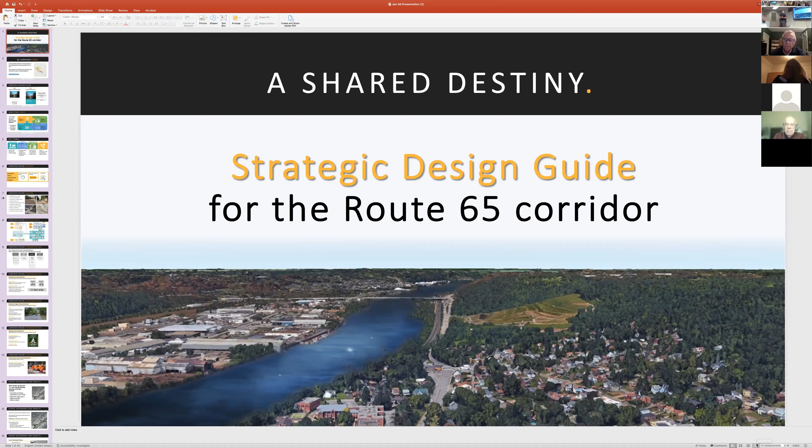With that being said, I want to introduce Kirsten from Michael Baker International Company, who is going to take over this presentation and introduce the concepts and findings.

Thank you all for being here today, and thank you for all coming out here on this icy night, and for those who are online. We wanted to talk through the results and present an overview of this report, the design guide for the Route 65 study. Tonight we're going to talk through the report, show you where to find it online, and we want to really hear from all of you what you think of some of these ideas, and have some discussion about how we can move these forward together.

I'm here with Michael Baker International, and we also have team members who have been working on this from the Remaking Cities Institute at CMU. And of course, Susan, who was working with the QV COG, as Patrick said — this was always spearheaded and led by the QV COG.

This whole process started before I even came on board, back when the QV COG identified the boulevard along Route 65 as this great connecting asset between all the municipalities. I know many of you have been involved in this process since the beginning, so this is not new to you — you know how important that is. You've been part of these conversations to figure out how to maximize that asset, maximize the economic and community impact value of working together along this corridor.

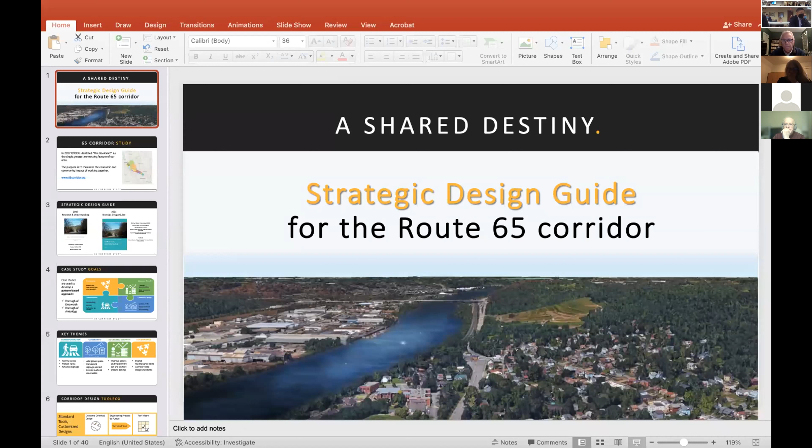We're not seeing the slides advance on the Zoom. Can't even see the mouse here. Hopefully for those who are on Zoom, they're able to use the chat or let us know, or just speak up and let us know if they're not hearing anything or anything needs to be repeated. Can you guys see the slides in Zoom? Yes. Do we get to see the slides? It's got to mirror the screens. It's gonna work out, yeah. Well, for everyone who's in the room, we'll try to get the slides back for you as well.

It's the mirror. I know we were going through just a little bit of the history — again, many of you are already familiar with this. There was a study done in 2019 that was led by CMU and the Remaking Cities Institute; they're going to talk a little bit about that tonight. That study, put out in 2019, was one of the first steps to really look at this whole corridor and define what is the vision for it, and what steps we need to take to start thinking of this as a boulevard. There was a research and understanding report that was put out, and I know that is available from CMU — it was available on the QV COG's website. That was the first phase.

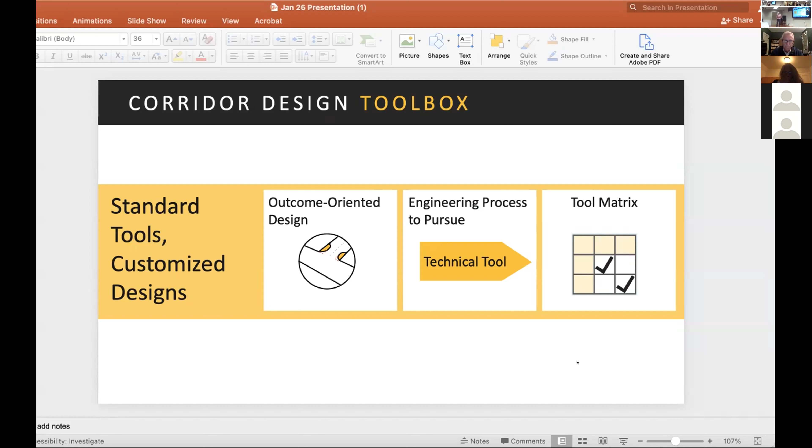So out of all of that, and out of all of the input we received from those who participated in the 2 workshops, we came up with a toolbox. We came up with a series of outcome-oriented designs paired with engineering processes to help municipalities understand how to go after achieving and implementing this process, and then a matrix to help them understand how these fit together, which ones can pair with what.

At a very quick glance, here are the 10 major toolkit items that came out of that. We're going to come back to these today because we're going to walk through them and we'd really like to hear from all of you. So our discussion will come back to all 10 of these, but we wanted to present, at a glance, what is in this report.

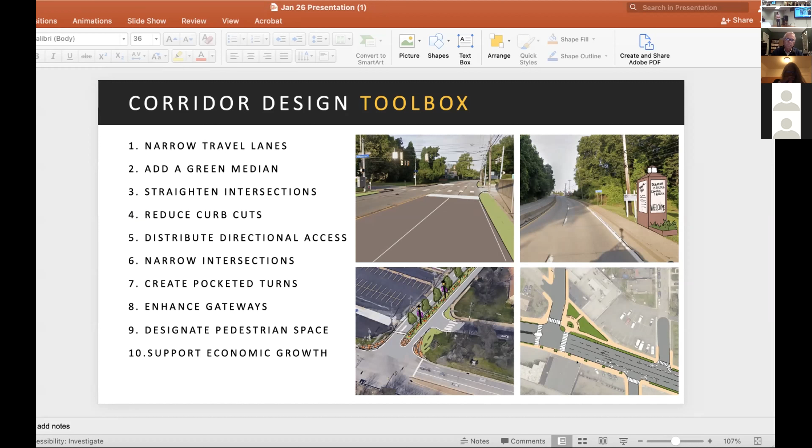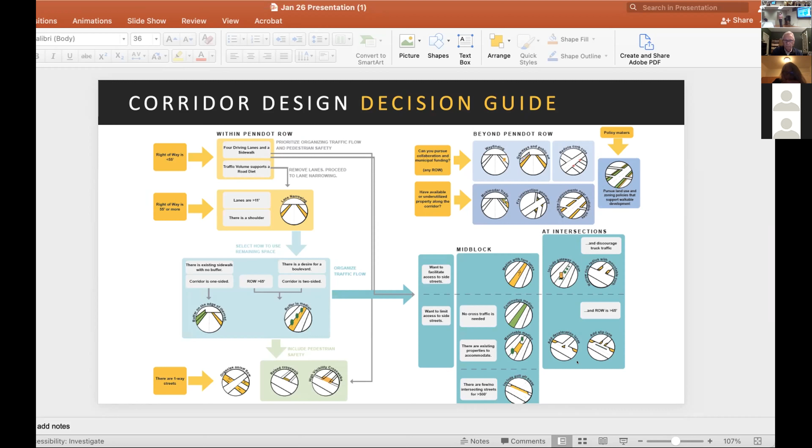With that, I'm going to pass it over to Steve to talk a little bit about the standardization. I know that's a lot of stuff in the toolbox, but again, we're going to come back to that. And I wanted to talk you through what are some of the other outcomes of this report.

Okay, thank you, Kirsten. Can everybody hear me okay? Yes.

The toolbox is great for giving you a whole range of design items to use for your particular municipality. We know that the corridor is not consistent along its whole way, and all of the 19 communities between Pittsburgh and Beaver along the Ohio River Boulevard, we know there's variations through that. And that's where the toolbox is very important for all of you.

We did find, though, that there were some items that needed to be standardized across the corridor so that one would know when driving on the corridor that it is the Ohio River Boulevard corridor. And we did that through 4 different items. One is the design of the roadway itself.

This is the paved part that you drive on. The second were the roadway edges—the sides and even a median in the middle—these are the locations outside of the travel lanes that you're on. Like, what's the edge of the road like? The third one is signage.

And we know that since there's 19 separate communities, each one of you wants to be identified in some manner, and we have a series of recommendations on consistency of signage. And the last item is construction zone.

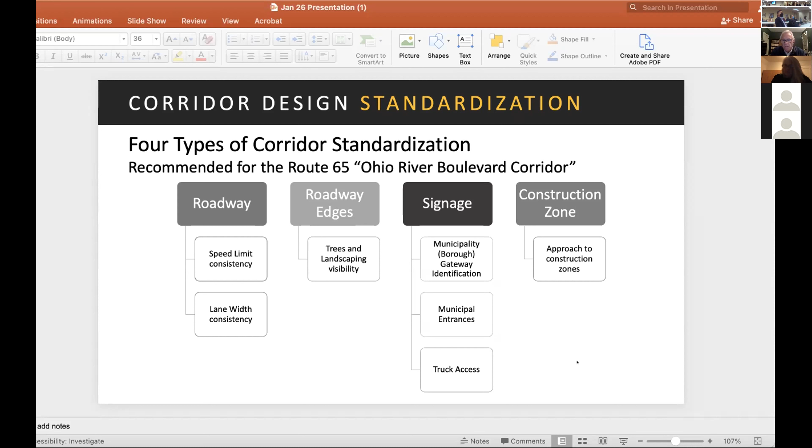In terms of the roadway travel lanes, we concluded that making this a boulevard rather than a limited access highway meant there was a real need to slow down for safety reasons. We heard this from both the workshops in Ambridge and Emsworth, and consistently throughout the study. The speed limit right now between Bellevue and Emsworth is 40 miles an hour, the narrowest part of the corridor. Because it's a PennDOT road, we felt we needed to maintain that as a consistent speed.

There are other portions that go up to 45, 50, and even 55 miles an hour in some parts. But as you begin to standardize the roadway, by making all the travel lanes a consistent width, that allows you to consider the road as a slower moving boulevard rather than a high speed one. Making the travel lanes 11 feet wide works very well in the older section of the corridor up through Emsworth, where it then begins to widen out. When the travel lanes get really wide, people speed and it becomes dangerous, and we heard that many times.

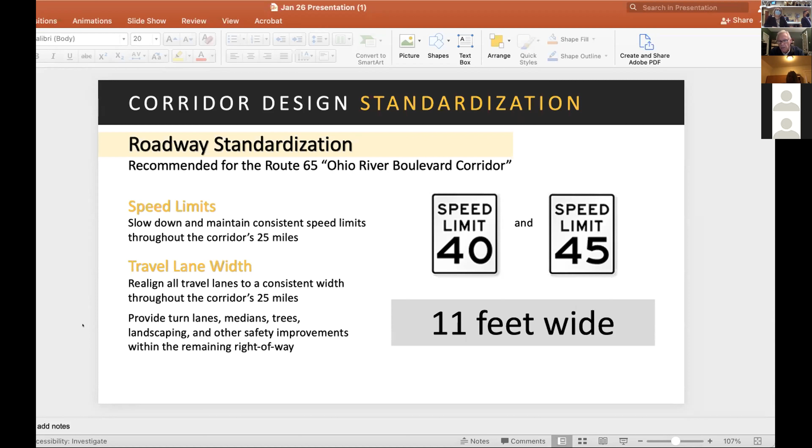So there are 4 travel lanes. We propose making them consistently 11 feet wide each for the full distance, about 25 miles of roadway.

The next item was that if we make all the travel lanes 11 feet wide, we're going to have some leftover space in some areas, because the right of way is a minimum of about 50 feet wide. That's the size you see here in Ben Avon, where the roadway itself takes up about 44, maybe 45 feet, with right of way extending on both sides of the property. We wanted to use that space to add aesthetics, signage, and other things to make this a pleasant driving experience.

One thing we looked at was how to add trees to the roadway, as nice and beautiful as those we see in Ben Avon. However, to make it safer, and so self-driving cars as well as most drivers can see people exiting their driveways and coming into intersections, we pull the trees back about 10 to 12 feet from the curb line of the highway. That way everybody can see, and people won't be darting out into travel lanes.

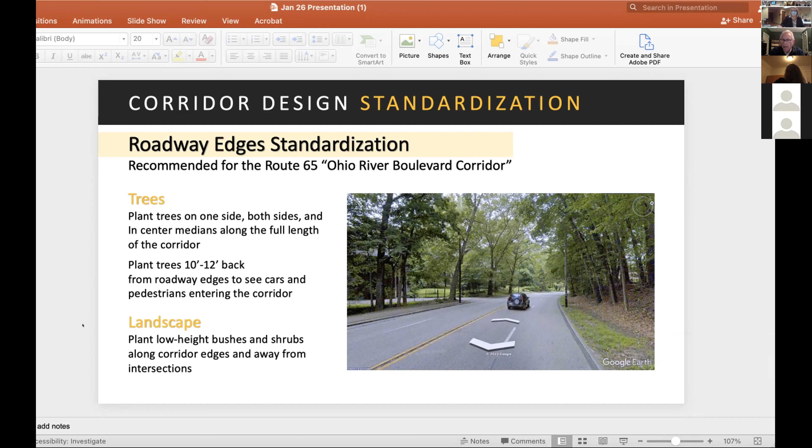There'll be plenty of visibility. Other types of vegetation we want to keep planted fairly low, because when you're sitting in a car you're no more than about 3.5 feet off the roadway, and if bushes are 10 feet high, you just cannot see. We found a lot of instances of heavy vegetation and bushes around intersections, so our recommendation was to be consistent, keep it low, and keep it clear of the corner intersections.

The third thing was signage. One of our concerns was how to make sure everyone could be recognized, and that each of your municipalities was really given a place within this 25 miles. We thought that between landscaping and signage, we could achieve that.

What became important to us was that when you enter a new municipality, there'd be gateway signage to identify it, like here using the Borough of Ambridge's logo. There'd be signs as you enter each municipality in both directions, identification signs so people would know where they are. It also became important, particularly when looking at Ambridge, to consider the entrances into the boroughs.

These needed to be signed so that the public would know this is where we would like you to enter our community, not on some side street, which is a residential area, but onto the streets where we can accommodate you much better and make a grand entrance into the community.

We also saw that trucks are using local streets a lot of times. We were very concerned that trucks be managed off the highway so that they could not just turn onto any street, but would only enter on streets identified for truck access.

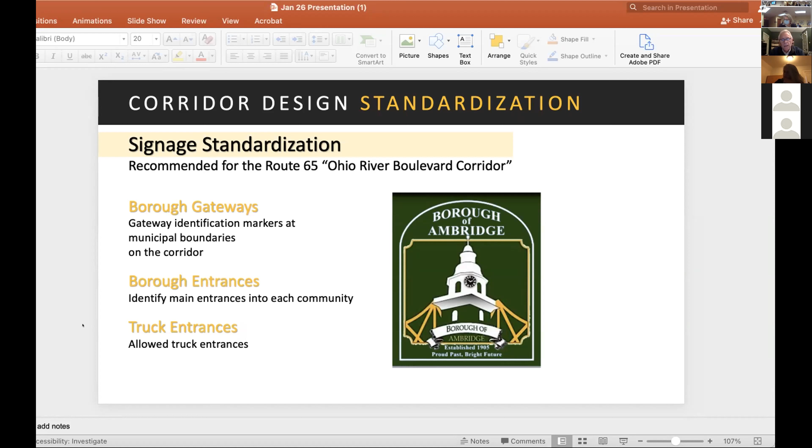So those are the three main ones. There's a few others, but these are the ones that were really important. And the last item, which is on the next slide, is about construction zones. This is more for the self-driving or driver-assisted automobiles in terms of safety.

When construction areas are set up along any corridor, particularly on the arterials and faster moving streets throughout the Commonwealth, they're not necessarily consistent. If you're in a self-driving or driver-assisted car, it needs to understand that what it's entering into may not have been mapped before. So having consistency in the distances, how signage is placed, and other attributes for construction zones, with plenty of visualization, we feel will also be a great safety feature in the long run.

So those are the four areas of standardization, and I just hit the main ones. There are a few more, but these are really the important ones, so that you have consistency along the entire Ohio River Boulevard, know where you are, but also make it such that each of your municipalities can have their own place.

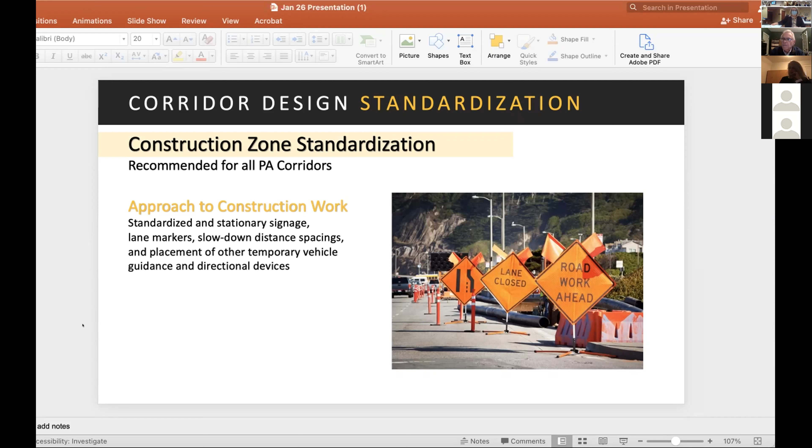Thanks, Steve. Thanks, Kirsten. Hi, everybody. It's nice to be back in the old stomping grounds.

The COG's role in this, in addition to hopefully getting the project kicked off and garnering the support and participation of experts, really was to contribute on the topic of governance and this idea of shared governance.

Now, I know you're all admiring my printed version of the report. It's 148 pages. You're all welcome to print it out too, but nobody's walking out with this copy tonight. I am going to use it though.

So if you look at the report, which Pat, I think you put on the website, it's on Issuu, so you can leaf through it. It may only ever live as a PDF in your world. The governance stuff starts pretty much towards the back.

And the reason why governance is so relevant to this topic is because corridors by their nature are intergovernmental. All of you, when you got here today, traveled through several municipalities to get here.

Did you walk here, Julie? I actually did drive on 65 today. Did you go through today? But to get here tonight, maybe not so much. No. But by their nature, they're intergovernmental.

They are intended to connect, and it does. It's ubiquitous, part of everyday life here along the Ohio River. So governance is really relevant to any design standards that the experts come up with, any aspirations you as individual municipal officials have for your town.

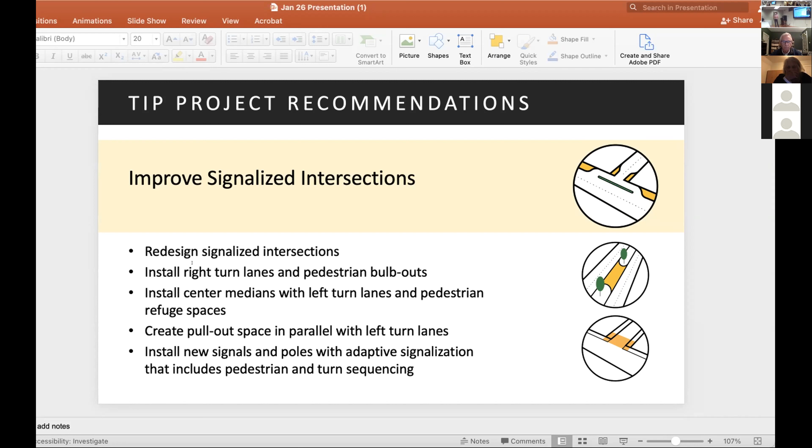And then the last one is to install wayfinding signage. This is also kind of a fun one for the communities, and it got a lot of interest during the workshops as well. You've got great community identity—turn that into improved wayfinding signage that connects the 19 municipalities, with some consistent themes and artwork along each, but maybe also some unique pieces that introduce the unique character of each. Design, fabricate, and install a new wayfinding and street signage design guide for the whole corridor.

So those were the 3 big projects that we took. There are so many recommendations in this report, and it's meant to be really a toolkit. Each municipality has similar characteristics but also unique characteristics, and is going to find that slightly different solutions are right for them. But these 3 overarching recommendations were the ones that rose to the top as your ready-to-go next projects.

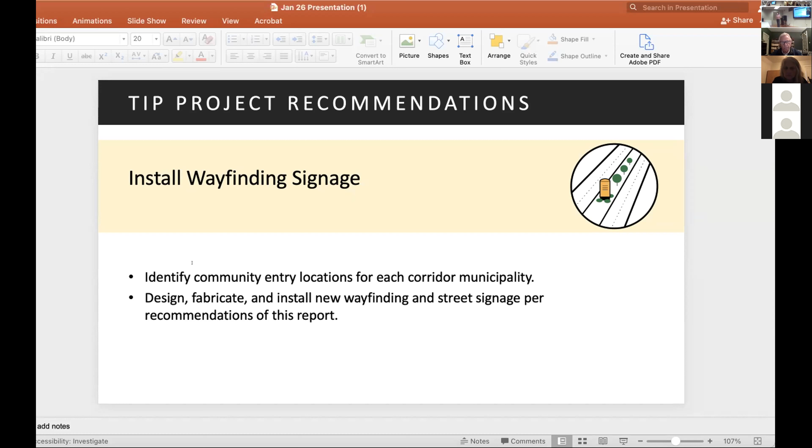A couple of other high-level conclusions, and this is a little more aimed at PennDOT—they did fund this study, so there are some recommendations in there for them too. A separate corridor classification is needed. The current classification for corridors doesn't take into consideration that roads like Route 65 are main streets for some communities and arterials between communities. The PennDOT road classification system doesn't really acknowledge that you can have roads that are major connectors that are also your town main streets, and they don't give you ways to control for lower speed, for example.

So they need a new classification system, and they need to develop and adopt corridor-specific guidelines in response to that new classification, and then work with the municipalities to develop a corridor master plan. This has been delivered to PennDOT as well—this is a report that they sponsored, and they have these recommendations as well.

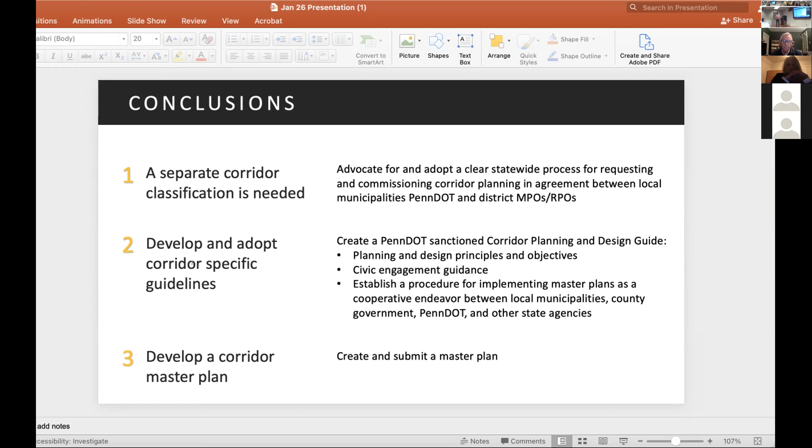We gave the high-level walkthrough of everything that came out of that report—everything you can find if you go in and want to read more: the toolkit, the case studies, the specific standards that were developed throughout this report. The entire document is posted on Issuu, like Susan said, and that link is available through the QVCOG website.

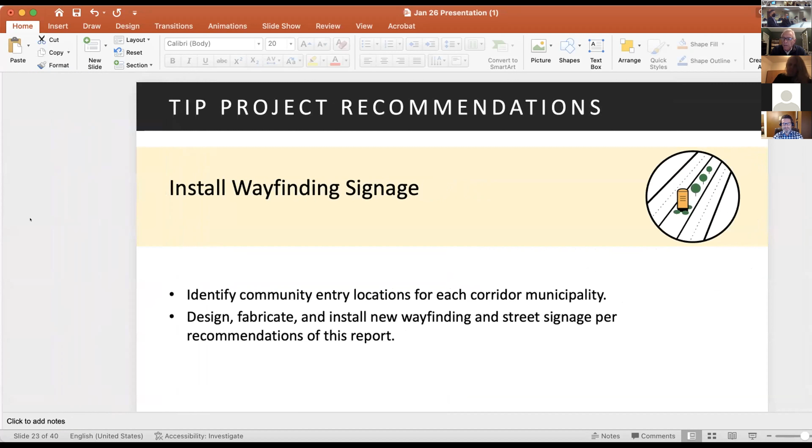And once you get in, PennDOT Connects is the one to fund a master plan for you. Once you start doing a master plan, all of the details of each of the 19 communities would be taken into account. For example, Old Economy Village is a major historic asset for the entire corridor, but it's also an issue for how transportation works in the Ambridge area.

And we know there's problems with access into the Old Economy historic area. It's basically residential streets, and how do you direct traffic and so on. That's the kind of thing a master plan will take into account.

But right now we were looking for how we can get 19 communities to be on the same page, so that all of you could speak as one voice with PennDOT and make this process a lot easier for all of you.

Yeah, and to prime that pump, to begin to reimagine it differently - that was my experience. I was the executive director of the COG for a number of years, and the boulevard is ubiquitous. It's an obstacle to get around, it's also a pain in our butt, but it's also the thing that connects us. Our economic vitality depends upon it.

So this report really is just the beginning. That integrated master plan is really what you're going to see meaningful recommendations come out of. This is to prime the pump in many ways.

It was also asked earlier, what can individual municipalities do? Because it can be hard or take time to get those collaborative agreements on board, and are there things you can do? Absolutely there are. The way this is put together, it's a toolkit with lots of individual items, structured for each of the municipalities to be able to take it and apply it as you see fit.

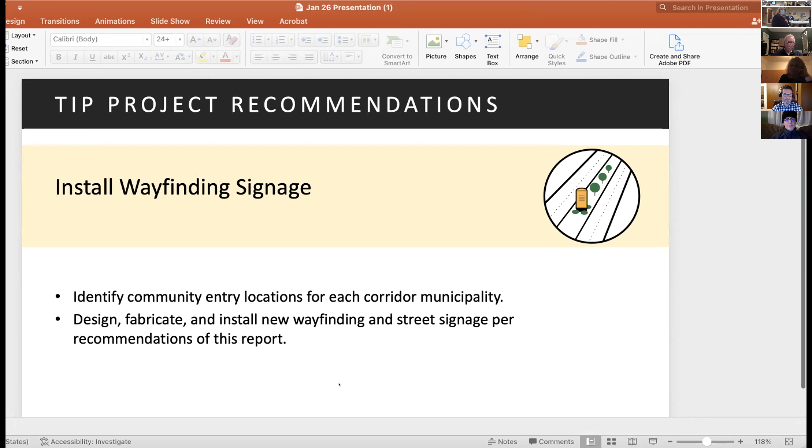Thank you. Can you just one more time run through the TIP recommendations so they have a little more context in terms of what those suggestions were from the study authors? Can you minimize that chat, and just restate those, Kirsten, if you don't mind?

Sure, so one of the first ones that came out is to restripe the Route 65 corridor for travel lanes and unsignalized intersections. That restriping reflects a standardization concept of going to 11-foot lanes, not having areas where the lanes go to 12 or 13 feet, which is highway standard or larger. That allows people to think this is a high-speed road, and then they get to one of the municipalities where the lane width goes down to 11, but they're hitting that at high speeds. So going to a consistent 11-foot width and getting rid of that extra space is one of the recommendations. That's a fairly straightforward project to go after.

In conjunction with that, you could add additional turn lanes, turn lane striping where you have additional space. There are areas along 65, and again it varies along the corridor, you don't have the same space everywhere. There are plenty of areas where you've got a wide enough shoulder to use some of that extra space and have a turn lane that helps get people off of the busy route when they're trying to turn into a residential neighborhood. Restriping also includes travel lanes and unsignalized intersections, so when you don't have a stoplight, you have clear striping on the ground to indicate when people need to slow down to turn, and high visibility crosswalks, so that if people are trying to cross Route 65 or a side street, there are clear crosswalks there.

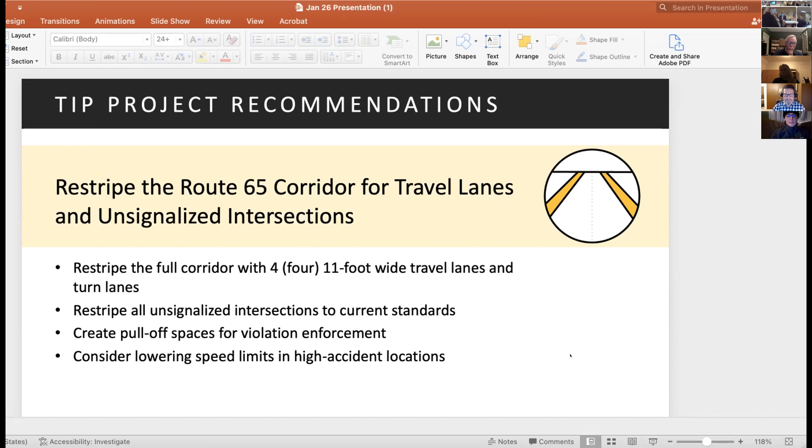I know the report's completed, but just a suggestion regarding restriping intersections, and talking about speed limit - something effective is actually putting the speed limit on the surface of the road. Maybe more people would pay attention just seeing it. You can put a gazillion signs on the side and no one pays attention to those, but sometimes seeing it there on the road works.

Well, that's because they do that on school districts too, on schools, right? So I guess people just get scared whenever they see something on the road. Yeah, I think the road kind of captures people. I'm not a traffic expert, but I know my behavior when I see it there. People don't pay as much attention to signs, especially on the side, and they feel comfortable driving. That's why the design of the road is so much more important in guiding how fast people drive than just the sign.

You tell people to go 20, but if it's a highway, they're not going to go 20. And let's be honest, it's tunnel vision that we all get - the faster you go, the more tunnel vision you end up having because you're just worried about what's in front of you, and not necessarily watching what's next to you, which is okay on a highway, but not in places like what we're talking about.

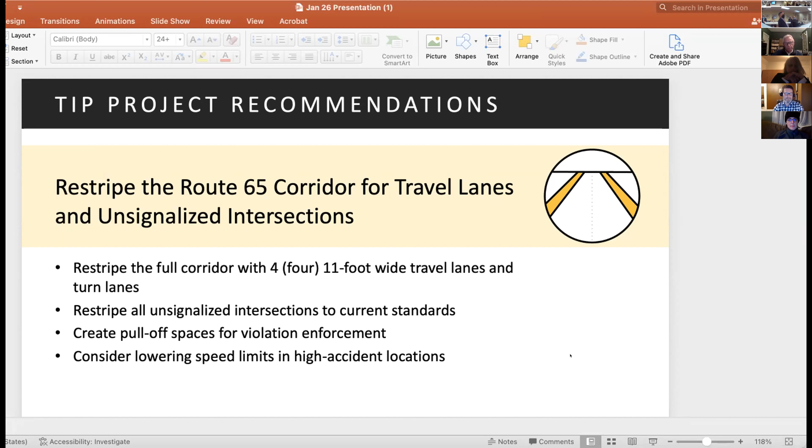I don't want anybody to think I'm the one going 65. But when I'm driving, I know my behavior - when I see that white line going across, I know someone might be running a speed trap there, and it slows me down. So I think we're more focused on the surface of the road if we implement signage. In Scandinavia they've really developed this - I know there are communities that do it even on local roads. They have a pattern drawn on the ground that looks 3D, as if you're going to hit something - like a flat speed bump that's just painted as a shadow onto the road.

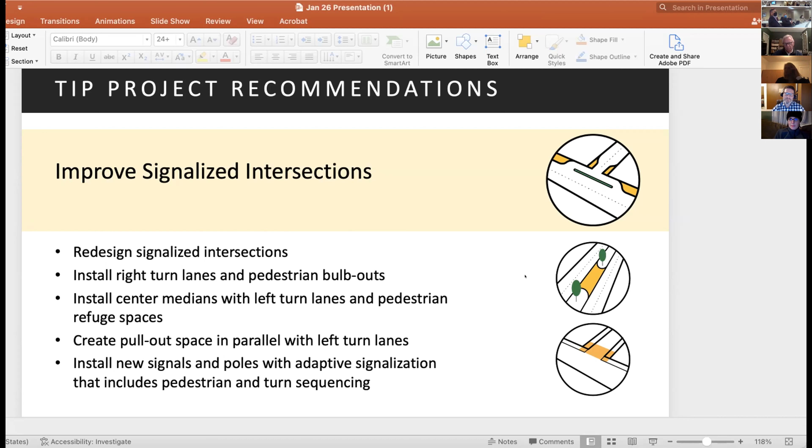Yeah, and each intersection might be a bit different, but those are some of the toolkit items that will often apply. And by focusing on your signalized intersections first, you're giving them extra safety improvements, making sure people are really able to cross the street safely there, improving safety for pedestrians where they have the most ability to cross.

And kind of like what Susan was saying earlier about wayfinding signage and roadway signage, you identify a community entry location for each corridor before you get to the intersection, because once cars get to the intersection going 45 miles per hour, they're not going to stop for a red light. Then you design, fabricate, and install new wayfinding and street signage per the recommendations of this report.

So the idea is to create something really beautiful that talks about the places that you are. Each one of the towns along 65 is incredibly individual, and that's fantastic — it's like a pearl necklace, having all these little pearls attached, each one very beautiful, but you need to start showing that to people who are driving on the street, in the car. So those are some of the rest of the recommendations.

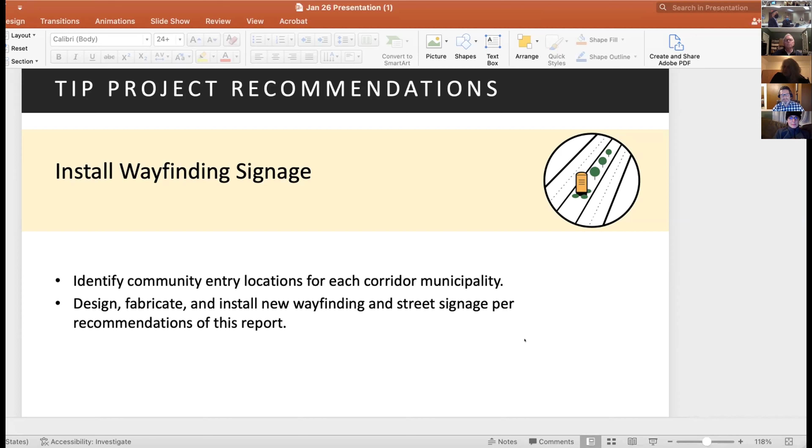I had a comment just on a personal note. I've lived in Emsworth and in Sewickley for the past 15 years, and I said to my husband many years ago that I just thought Route 65 was the scariest death trap of a road, and we had to drive on it — there was no other option, and it was such a scary place. Since then, I've gotten involved in public service, and I want to see other people get involved too, because we need help and there's a lot to do and people don't want to volunteer. I understand the challenges of it, but when I was leaving to come here tonight, I said to my husband, can you believe that I'm going to this meeting to talk about fixing 65? This is something that I was so upset by for years, and now to be in a position where we could influence it, it's just amazing. So thank you so much for the work that you put into it — it makes me so hopeful.

Yeah, thank you. And remember, these are toolkits that could be used anywhere, so obviously they still have to be looked at individually in different places. Like Chad said, there are some things that may not work in this community that work somewhere else. But I think that's where the master plan will come in and really look in more detail at what are the real good toolkits that can work in different places.